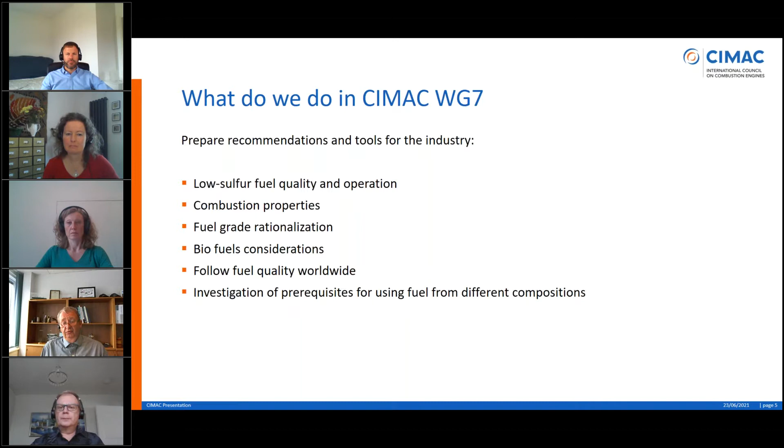Investigation of prerequisites for using fuel from different compositions. We are 36 members. Unfortunately, it's necessary to have a waiting list. We are not able to be as many as we wanted to be. It would not be practical, and it would not be an easy way to have a recommendation made and so on.

We need to be efficient, but we are represented by refiners, suppliers, OEMs like ourselves and MAN, ship operators, fuel testing labs, classification societies, and others. So it's a group of specialists taking care of these recommendations and tools for the industry. We work very closely with ISO 8217, making the standards for fuel oil, and many of us are actually represented there also.

We make a lot of guidelines and publications, and without saying more, I would like to give the word to Charlotte. If you would like to have more information about what we recommend in our tools, please go to the CIMAC website. So I will pass the presentation here and go to you, Charlotte.

Thank you very much, Kjeld. Now let me see if I can show my screen here. Kjeld, can you confirm you can see my screen? I can see your screen, yes. Perfect, thank you very much.

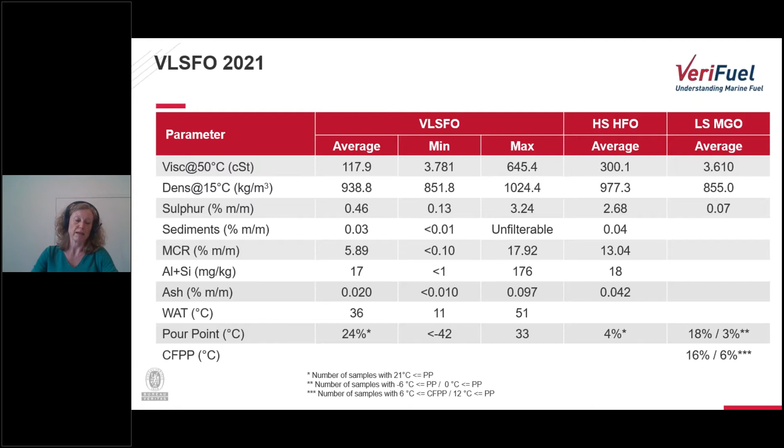What is important to note here is that the separators can easily remove the cat fines from these new fuels compared to the traditional fuels, because the average viscosity and density is lower than what we have been used to in the past. And we can also see that a higher percentage of VLSFOs have a higher pour point compared to the traditional fuels. 24% of the tested VLSFOs have a pour point exceeding 21. They are still within spec up to 30 degrees on the pour point, but we have a higher portion of samples that have higher pour points.

Also, if we look at the operational reports, because one thing is, of course, whether the fuels meet the spec limits, but it's also a matter of how these fuels perform when we start consuming them. For the VLSFOs, on the operational reports that we issue in the Verifuel team, around 50%, half of them, receive some sort of technical advice or recommendation for the crew to take note of in order to ensure safe operation. So if we look at the samples where we issue an amber alert or a caution, it's on pour point, it's on cat fines, and it's on sediment levels.

And then we have those 0.4% of the operation reports that get a real alert, meaning these are fuels that should be used with extreme caution and may cause difficulties to operation. Here we had a few samples with very high cat fines content, as high as 176 ppm. And we have seen some high sediment levels where the samples could not be filtered in the lab because of asphaltenic sludge coming out.

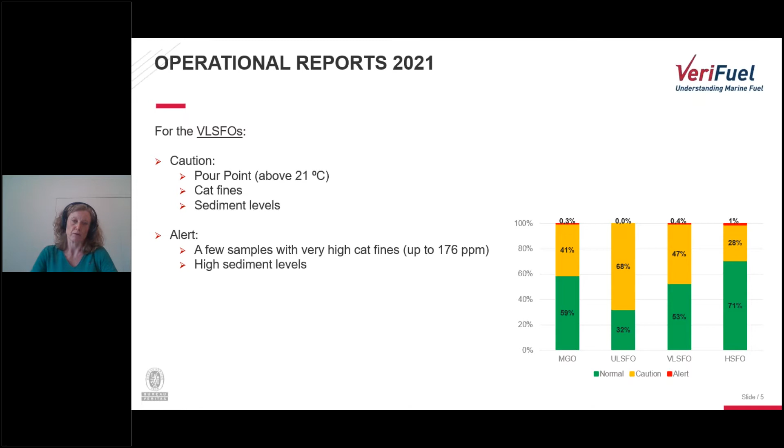So if we just sum up the operational issues that we have seen throughout 2021, as many as 75% of them are related to filter clogging and separator sludging, asphaltenes coming out of solution, either from unstable fuel at delivery or due to an incompatibility because two fuels have been mixed on board. What is a little different now compared to what we have seen in the past before 2020 is that even low mixing ratios may turn a fuel unstable or cause an incompatibility between these two fuels.

The very strong recommendation to avoid experiencing these issues is to keep the fuel segregated, to try to reduce settling and service tank levels as much as possible before changing over to minimize the mixing that may occur on board. And of course, to manage the temperature very carefully to avoid overheating the fuel, because heat may make this process of the asphaltenes coming out even worse or go faster. And especially to be cautious of thermal oil heating, because thermal oil heating may generate some very hot spots around those heating coils. So those are some of the primary recommendations for the industry to be aware of considering the VLSFOs.

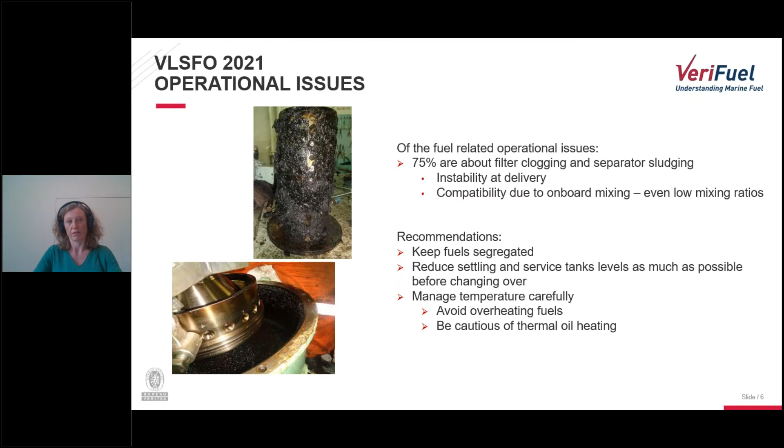Overall, I would say that we do not see more cases of operational issues than we saw before, but of those fuels that do cause issues, it's really related to stability or compatibility of the fuels. That was the very short summary I had prepared related to the VLSFOs and the status.

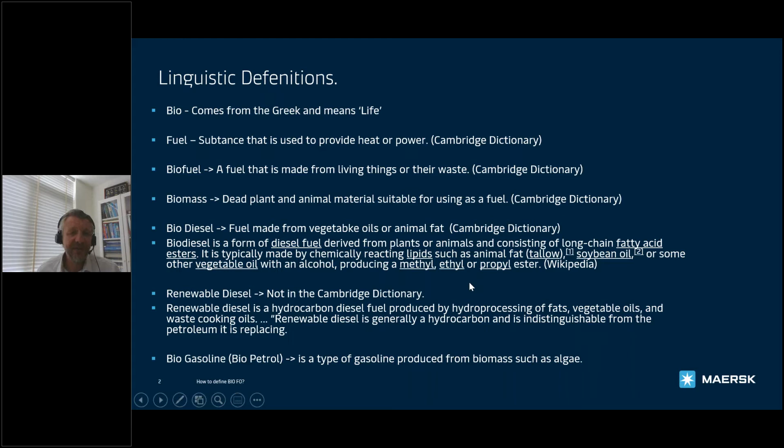Don't forget, there's also other biofuels like biogasoline, which is something we as diesel people do not always have on top of our head, but it's also produced from biomaterial. The reason for this exercise is basically that I wanted to show there's quite some dispute about how you actually use which word for which substance to define a biodiesel, but that's a starting point.

So where are we today? Today we have the ISO 8217, which defines the fuel that we use on board of our vessels, which is predominantly designed around fossil fuels, and that's also how we use it. But it's good to realize that already there's a part which actually contains bio material.

For instance, in the distillate range, we have the max 7% FAME, which is more or less a copy and paste from what's used in the automotive industry. And there's another thing that's not that commonly used, which is the description of the feedstock of the fuel, the material used to produce it, which for this specification is predominantly hydrocarbons from petroleum sources. But there's already also the option to include some hydrotreated vegetable oils, GTL and BTL.

Again, it's not something we currently see much used, but it also emphasizes the fact that we need to work on getting some sort of more guidelines for the industry on how to define a biofuel. So the next slide is a short overview to give you an idea about the diversity of feedstock, but also production processes that are used to create a biofuel.

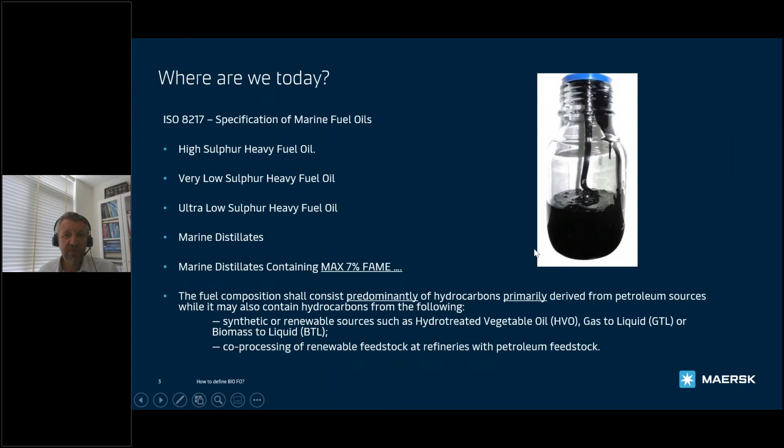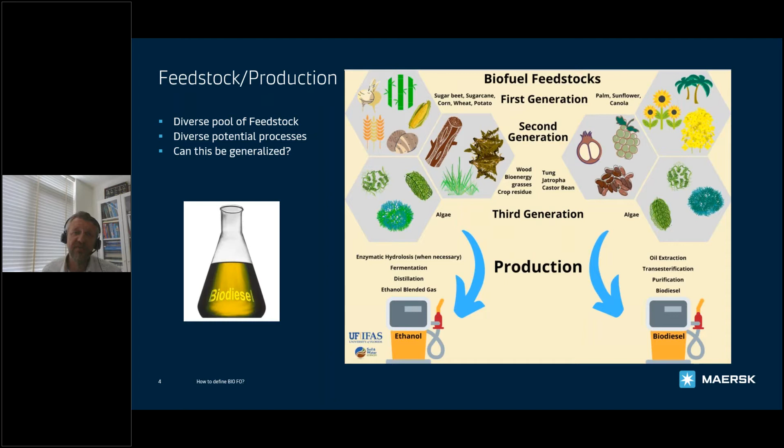I think the main message is that it's going to be hard to generalize everything because there's such a big variety of different components, processes, and streams.

So where does it leave us? It leaves us with overlooking, okay, if we take a biofuel, how are we going to evaluate that? And then we need to take into consideration the operational challenges, and I'm sure my next presenters will give you more insight on that.

A good example is seals. If you take FAME, and you go to 100% FAME, you will see that you need to verify if your seals can actually handle that fuel. You need to look at the effect long-term on the engine. You need to look at storage, long-term storage, but also mixing between products.

And another thing is, what's the true impact on the environment? What's the NOx emissions, for example? There's also another presentation on that, so I will not go into more details.

Another consideration is how do you ensure that the quality of the fuel, or the blend, is actually up to the standard you need to use it safely on board your vessel. That means you need to define what's coming into the marine fuel pool, and the biofeed entering the pool. You need to define how much you'll be blending potentially, and how that end product will look.

Which sounds easy, but if you look at the bunker fuel that we're using, it's going to be more challenging to identify those components.

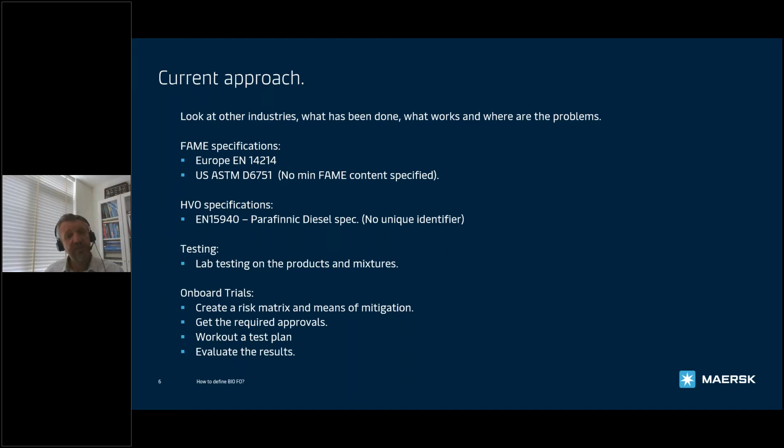You create a risk matrix, look at what the risks are and how you can mitigate them. You need to get the required approvals because you're going outside the specified fuel, so you need to go to your flag state and discuss it with your class, which in turn indicates you need something that sets and standardizes it so others can use it going forward. You work out your test plan, evaluate the results, and then see if it's suitable for use or not.

So how to standardize marine biofuel, how to define it, is basically standardizing it. I think we need to realize there are many unknowns, and that should not be a showstopper. There's a clear need within the industry to continue in that aspect, and that's what we're doing today. Within ISO 8217, there's a focus group on bio currently active.

This group will do a lot of work to actually start including FAME as a blend component into the residual side of marine fuels, adopting the current standard to make that possible and to standardize it so everybody can use it in the future. The second stream is to incorporate different processes that are available, but also side streams from the current FAME process, and see how we can get that certified at some stage into a marine biofuel standard, so those can be used without additional work, in the effort to make biofuel a complementary part of the fuel mix.

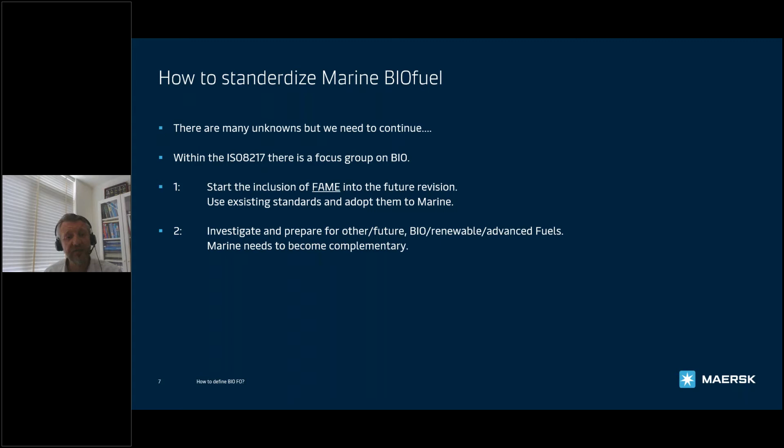That's basically what I had to say about this. I think questions will come later. Yes, thank you very much.

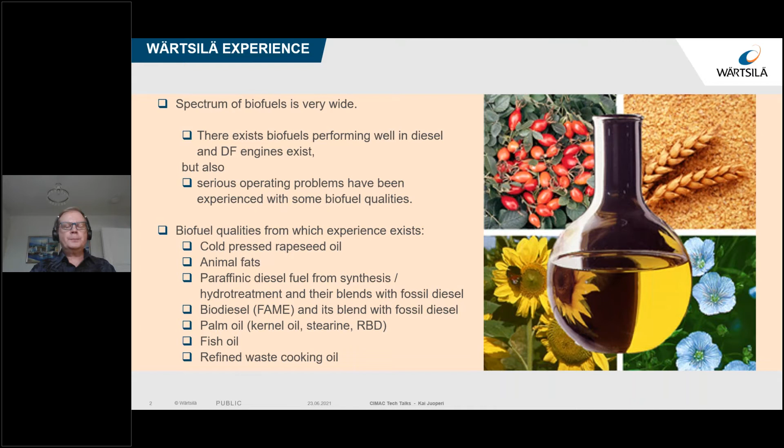So what we have seen in our discussions, both internally and from potential or existing customers, it can be indicated that the interest towards the use of biofuels has clearly increased during the latest years.

On the marine side, I would say that the biggest interest is to use so-called drop-in fuels, so you don't need to do any modifications to the engines, and you can blend those fuels with fossil fuels. So then we are talking about hydrotreated vegetable oils and biodiesel. Some customers are more interested in pure biofuel use, and some are asking or considering that maybe they will use B10, B20, B30. So the percentage of biocomponent has increased, what we have seen lately.

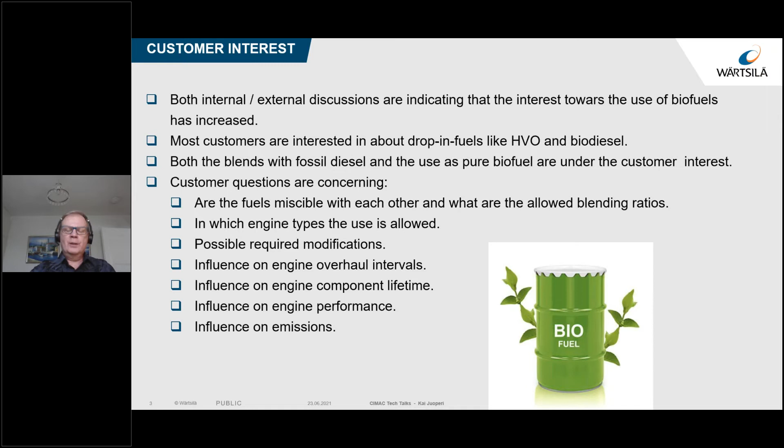I have listed here some typical questions we get from customers. One is, for example, are those fuels miscible with each other, and what are the allowed blending ratios? Then in which engine types is the use allowed? Do we need to do modifications? And what are the influences of using biofuel? Does it influence scheduled engine overhaul intervals? Will engine component lifetime be shorter or longer? And how is it with engine performance? How is it with emissions? Those are very, very common questions.

At the moment, at least what we have seen, biodiesel is the product where the biggest interest exists. So I have listed here pros and cons of biodiesel. Since the fuel is in practice close to sulfur-free, sulfur oxide emissions are also at very low level. The same is valid for particulate emissions. Sulfur and ash are the main contributors to particulate emissions, and those are at low level. And then what is the whole meaning of using biofuels is to reduce CO2 emissions.

Biodiesel mixes well with petroleum diesel. It has good lubrication properties, and it can be used in existing engines without modifications. And like we already heard from the previous presentation, there are also international standards available, which are good since the quality is then specified.

Then going to the negative things. I think the first one is creating nowadays a lot of discussions, and I think we will hear more in the later presentations. Also various experience exists. Our estimation, based on some measurements we have done in the laboratory engines, is that the NOx emissions are increased by 10 to 20% when using pure B100, so 100% biodiesel. And then various factors play a role, of course, like engine design and the combustion process. Also the raw material used in biodiesel results in different NOx emissions.

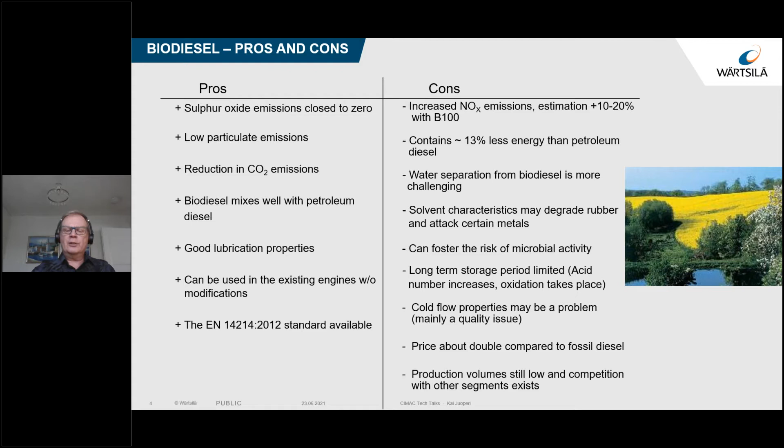Then price, that is of course something which is influencing customer decisions, whether they are interested in using it. And today the price is about double compared to fossil diesel. And if we think of the whole need of the marine industry, how much fuel is needed, production volumes are still low, and then there is also competition with other segments like automotive, for example.

Here I have one customer case from the field, a Norwegian customer, United European Car Carriers. They have quite many vessels with Wärtsilä engines. This is a vessel called Autosky, and it has two Wärtsilä 8L46 main engines. The customer has used a GoodFuels product, MR100, and at the time of investigation they had used it in both engines for more than 3,000 service hours.

Lube oil in the engine is a standard commercial, let's say, 40 BN, 30 oil. I would say they could manage even with lower BN oil, but since this has not created any issues, they have continued the use. The vessel engines are going through scheduled maintenance regularly.

When the biofuel use was investigated in more detail, fuel injection equipment is obviously where we first see issues if something is seen, and the injectors were inspected in more detail after the biofuel trial, but nothing abnormal was observed. The only negative thing the customer indicated was that there has been some wax formation in the fuel leak pipes, and now they are planning to install trace heating on all leak pipes so that possible clogging and wax formation can be avoided. And the customer message was that they are happy with the gathered experience and are planning to continue biofuel operation on these engines.

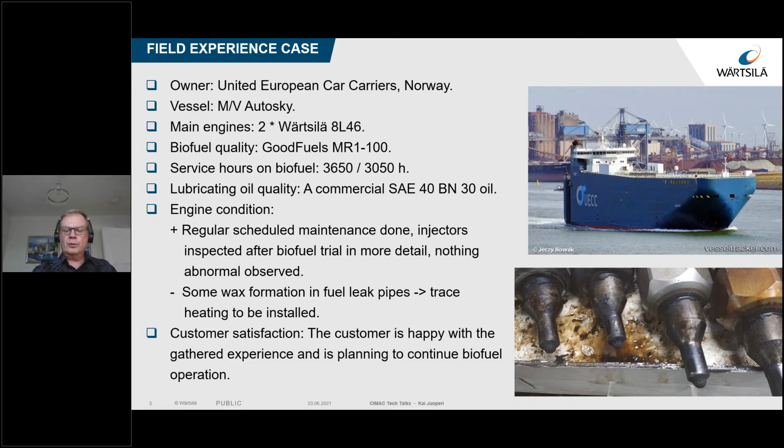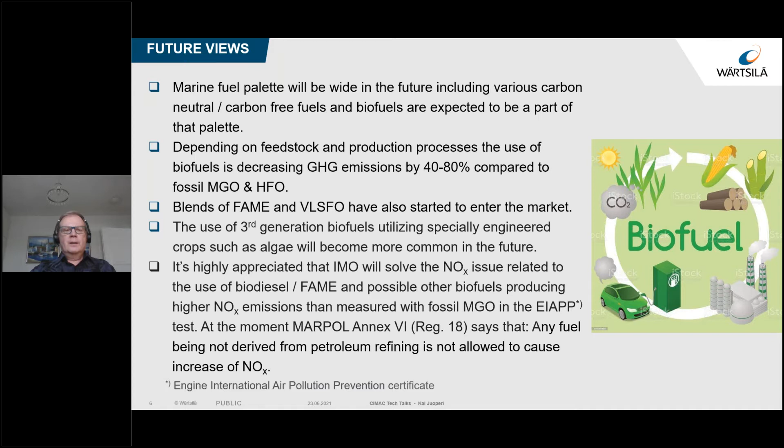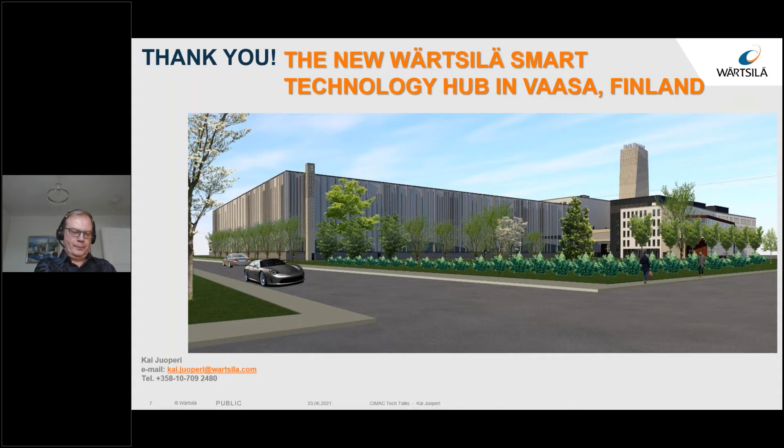So that was what I prepared for this event. Thank you. Thank you very much, Kai. Remco, are you ready? Yes, I am. Thank you very much. Let's see if this works. Yes, we can see it. Oh, that went a little bit too fast. Let me see if I can close it.

So thank you, Kjeld, and I would like to thank you all for the opportunity to speak today. I'll be discussing the handling of biofuels on board, focusing on fuel treatment systems such as the separator and the fuel conditioning systems, as well as the storage and further handling of biofuels in the tank.

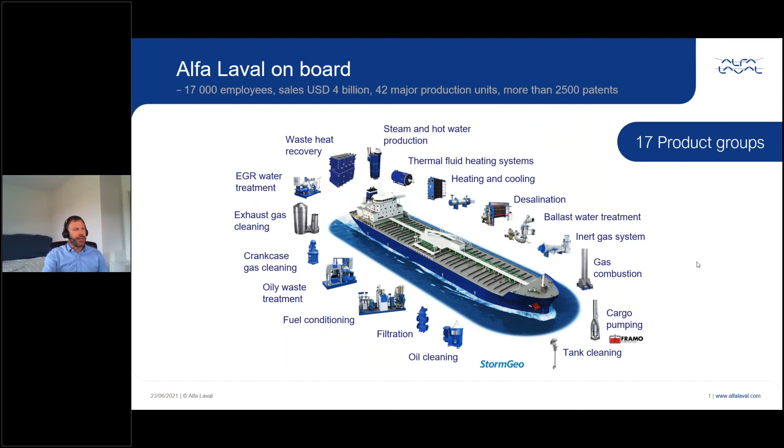So let's start with the treatment on board. Now, the good news is biofuel is fuel. It needs to be conditioned by heating and pressurizing. It needs to be cleaned using separators and filters, and it should not be mixed with other fuels due to potential incompatibility.

But since the introduction of the VLSFO fuels, ships have already been forced to pay much closer attention to fuel properties, and the fuel management plan does not need to be altered much to incorporate biofuels. Everything that Charlotte said was actually applicable.

Temperature is the critical factor here. Treat the fuel too cold and you have to deal with cold flow problems. Too warm and the biofuel will degrade faster. And these points can lie quite close to one another.

One other factor that directly affects biofuel properties in a negative way is the presence of water, as mentioned before. FAME is prone to bacterial contaminations that require water to reproduce. Thus, removing water at all times reduces the amount of contamination over time. So to be clear, this needs to be done in all tanks, including bunker tanks. Actively check for the presence of water at all times.

Water contamination leads in time to acidic products and sludge buildup with associated operational problems, such as filter and separator clogging or blockage of the fuel injector nozzles. Good housekeeping of biofuels is key. Dewater and use the fuel as soon as possible.

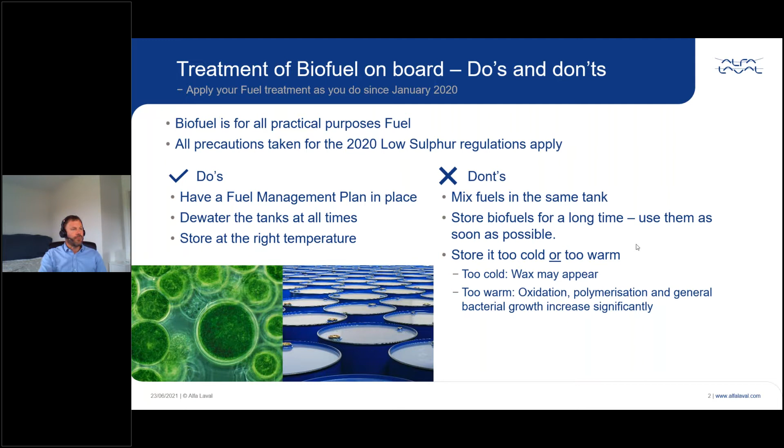Now, as Dax and Kai mentioned, apart from storage and handling, since FAME is more corrosive than fuel oil, it is important that the equipment in the fuel line can handle it. Therefore, I recommend verifying with your suppliers that their equipment can handle FAME. For example, the internal coating of a viscosity meter, O-rings in the separator, a mechanical seal in the transfer pump can all potentially suffer from FAME and lead to equipment malfunction.

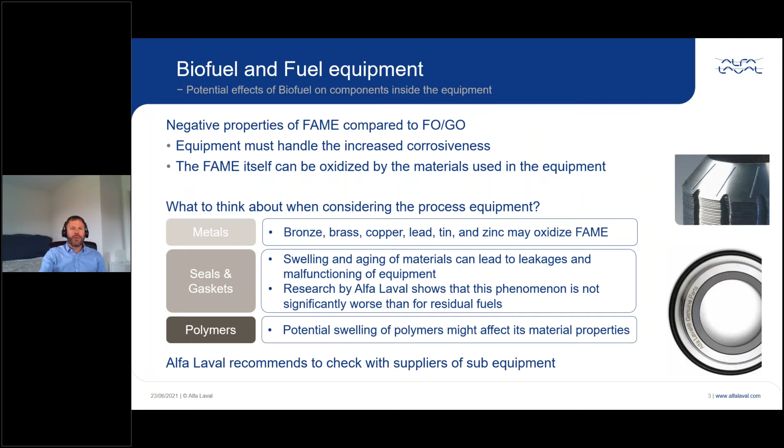So far, research and field tests have shown that for seals, gaskets, and O-rings, that phenomenon is not worse than for heavy fuel oil, but older equipment may not meet the expectations when using FAME. Also, consider the metals inside your equipment. FAME has oxidization properties that affect metals to one degree or another. A couple of examples are shown here on the screen. But in general, using a fluid like FAME for which the equipment is not specifically designed means verifying that the equipment will not suffer from its usage.

The cold flow temperatures of FAME are dependent on the feedstock, and relatively high. A short recap. Cold flow properties are noted from the lowest temperature up. So pour point is always the lowest cold flow property of a fuel, followed by the CFPP, and finally the cloud point, whereby pour point is the lowest temperature a liquid is pumpable, CFPP is a quantitative measure for the amount of wax, and cloud point the highest temperature wax crystals will appear. Now, problems with waxing won't appear above the cloud point, so once this is known, I recommend to keep the fuel above this temperature.

Trials are now carried out with mixtures of FAME and mineral oils with high blend ratios. And these are not only blends of FAME and distillates, but also of FAME and residual fuels. Cloud point and the CFPP are reliable minimum temperatures for distillate blends, but these temperatures cannot be determined with residual blends. So when encountering mixtures with heavy fuel oil, the WAT, the wax appearance temperature, is used instead.

And I recommend to specify this test to be performed in the bunker analysis. However, the wax appearance temperature does not give an indication of the amount of wax produced, only the temperature at which it will occur. So for safety reasons, it is better to keep the temperature above the WAT.

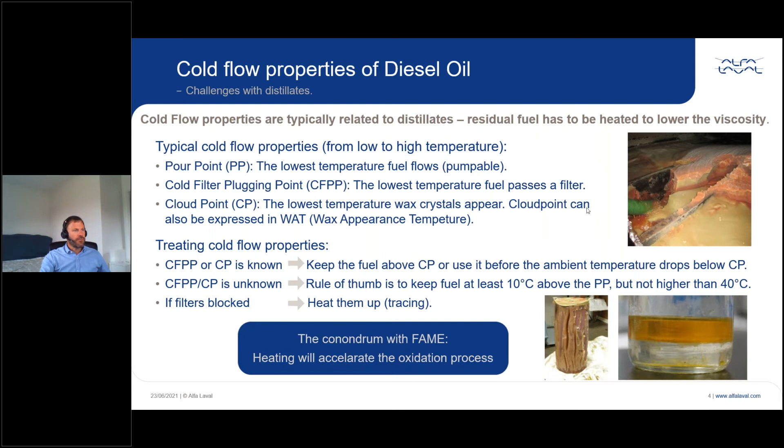A special on hydrotreated vegetable oil treatment in the separators. Fossil fuels, whether they are heavy fuel oil or diesel oil, typically do not have densities below 800 kilogram per cube. Separators are therefore typically not designed for the densities of HVO, which are specified as being between 770 and 790 kilogram per cube. This in turn creates some interesting problems that you need to be aware of.

Purifiers running with a gravity disk typically do not have a gravity disk for these low densities. Running the separator will cause very bad separation efficiency. So if you start using HVO, I recommend to run the purifier as a clarifier, so without a water seal, or to request an HVO gravity disk if available.

Automatic separators, such as the ALCAP separators from Alfa Laval, can handle HVO in a proper way, but I recommend to contact your separator supplier for potential problems or for modified settings to optimize the running of the separator. All of these solutions are maker and model specific, so there is no uniform solution.

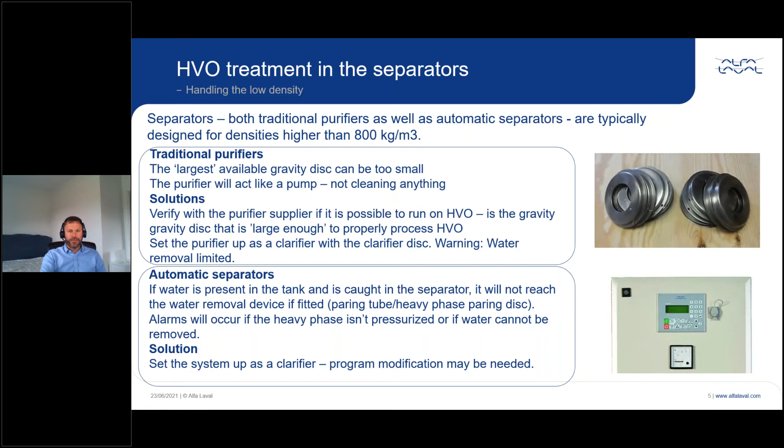Biofuel producers are actively testing their fuels in field tests and in laboratory tests. A test with BTL, biomass to liquid, will soon start in the Alfa Laval test center in Aalborg. Producers offer a large variety of their blends for testing, and it is relatively easy to test the fuels and reject those that, for example, produce a lot of sludge.

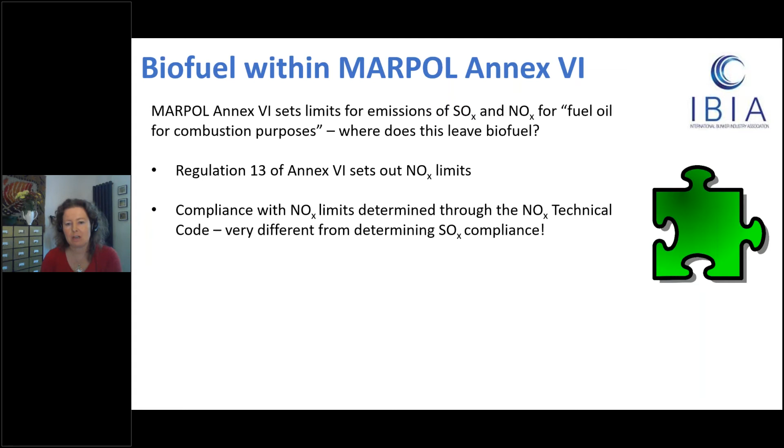Regulation 13 of Annex 6 sets out the limits for NOx, but compliance with the NOx limits is determined through the NOx Technical Code. And this is where it becomes very different from determining compliance with the sulfur limits. Because as you know, we have the 0.1% sulfur limit in the emission control areas, and outside of emission control areas the limit is 0.5% sulfur, and it's related to the sulfur in the fuel. If you're going to use exhaust gas cleaning systems, you need to prove equivalence with that sulfur limit. NOx is a little bit different.

And as Kai alluded to in his presentation earlier, there's an issue here with Regulation 18.3 of MARPOL Annex 6, which talks about fuel oil quality, because it differentiates between, in 18.3.1, blends of hydrocarbons derived from petroleum refining, i.e. your traditional bunkers, and, in 18.3.2, fuel oil for combustion purposes derived by methods other than petroleum refining. And of course, this is where you get your biofuels and your biofuel blends, which don't come from just refining crude oil in a refinery.

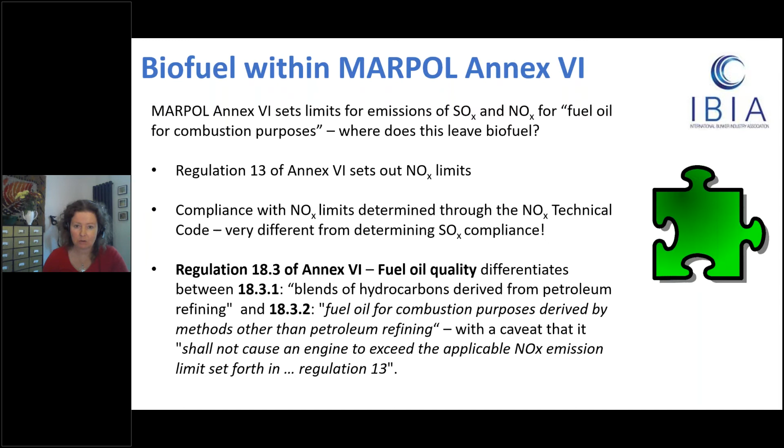And there's a caveat there that it shall not cause an engine to exceed the applicable NOx emission limits set forth in Regulation 13, which is where the limits are. So let's have a look at Regulation 13, NOx emission limits. There are different tiers for different ships. If your ship was constructed before 2000, there is no specified NOx limit because it wasn't developed yet.

Then you have Tier 2 for ships constructed on or after the 1st of January 2011. And you have a final Tier 3 for ships constructed from the 1st of January 2016 onwards, when they are operating within a NOx emission control area. Because emission control areas can set limits for sulfur, which we know is 0.1, they can also set specific limits for ships' NOx emissions. And those limits are significantly tighter in Tier 3 than in Tier 2, which is applicable when ships are sailing globally outside of NOx ECAs. And it only applies to ships constructed from 2016 onwards.

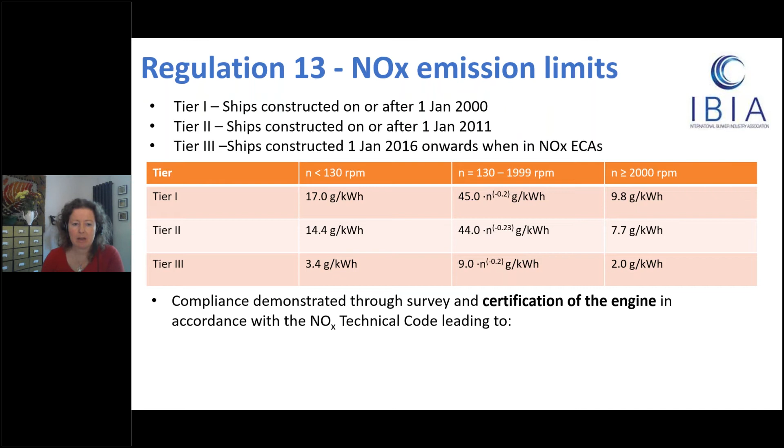So how do you demonstrate compliance with these emission limits, which are defined in grams per kilowatt hour? It's through survey and certification of the engine in accordance with the NOx Technical Code. And as Kai mentioned earlier, this leads you to obtain an Engine International Air Pollution Prevention certificate. And when you get that certificate for your engine, it's based on a specific test fuel oil, which is specified in the NOx code. The test fuel oil has been defined as ISO 8217:2005 distillate marine grade. So typically, the engine test will be performed on a marine gas oil, for example.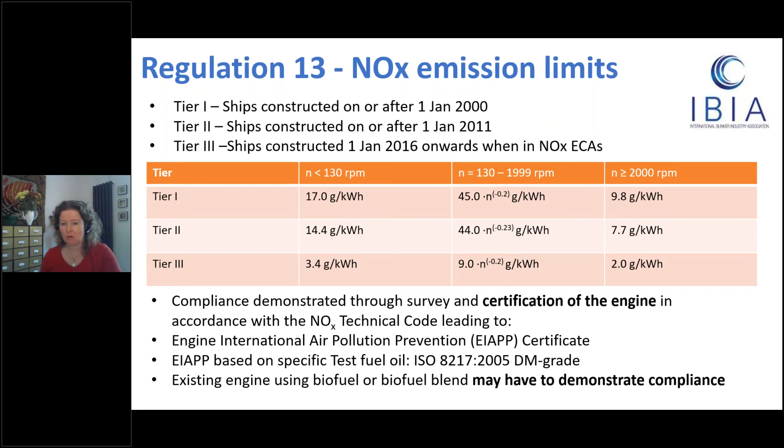So the existing engine using a biofuel or a biofuel blend may then have to demonstrate compliance with that, because it's no longer just a fuel according to Regulation 18.3.1. So the problem we have here is, how do you prove that the engine does not exceed the applicable NOx emission limit when the certificate is based on a test running on DM grade oil-based fuel oil?

It may, in fact, require onboard emission testing for fuel from non-petroleum sources, where the results could be presented in grams per kilowatt hour. Unfortunately, that's shown to be not particularly practical or reliable. You know, for ships that are using scrubbers or exhaust gas cleaning systems for sulfur, they can have a continuous emission monitoring system. Would you require something similar for NOx? To my knowledge, that isn't particularly well developed right now, so there is an issue here with that.

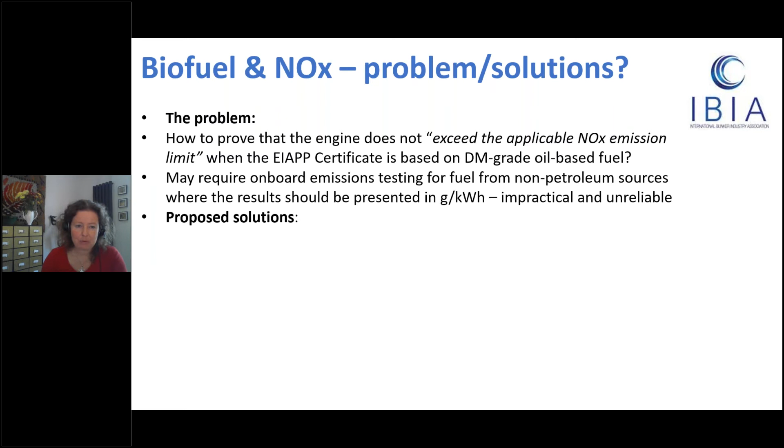Is there a way forward? There have been some proposed solutions going all the way back to 2016, actually. One is to allow Regulation 18.3.1 to cover all fuel oils and delete Regulation 18.3.2, which sets a specific mention of oils that are not from petroleum refining. And the reason IMarEST came up with that was that they recognized that there was a problem with the language in the NOx code for introducing biofuel and biofuel blends.

Then much more recently, there have been 2 papers actually put into MEPC 76. Now, because MEPC 76 was rather busy with other things, they didn't come up for discussion at the meeting that was happening very recently. But they are due to be considered at MEPC 77, which is due to take place in November this year. And one of these papers came from a group of countries: Germany, France, Greece, Japan, Singapore, and ICS. And the crux of it is that they invite administrations of parties to MARPOL Annex VI to issue temporary exemptions for ships conducting biofuel trials for greenhouse gas reduction purposes. And there are already exemptions within MARPOL, for example, for running emission control systems, such as exhaust gas cleaning systems. So their approach is to encourage administrations to provide these kinds of exemptions.

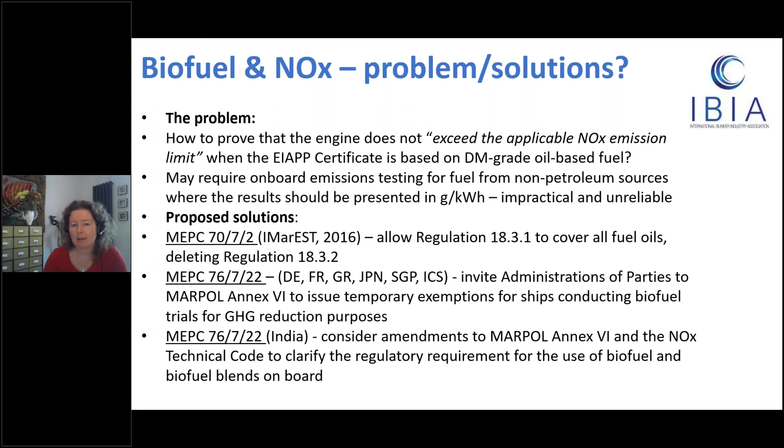Then there's an interesting paper also from India, which says consider amendments to MARPOL Annex VI and the NOx Technical Code to clarify the regulatory requirement for use of biofuel and biofuel blends on board. And to me, the proposals within that paper are a little bit more similar to what IMarEST proposed back in 2016. So there could be a way forward here.

Now, biofuel, of course, why are we interested in it? At the moment, it's not because it's cheaper, it's because of the emission reduction potential. So how does it compare to, for example, a distillate marine grade marine gas oil? We know that there's less sulfur emissions, but in fact, when you are burning it, it's quite similar in terms of the CO2 produced during combustion. And for NOx, as you heard from Kai earlier, there's some evidence that the NOx emissions might be higher, 10 to 20% for 100% biofuel, he mentioned, which is interesting.

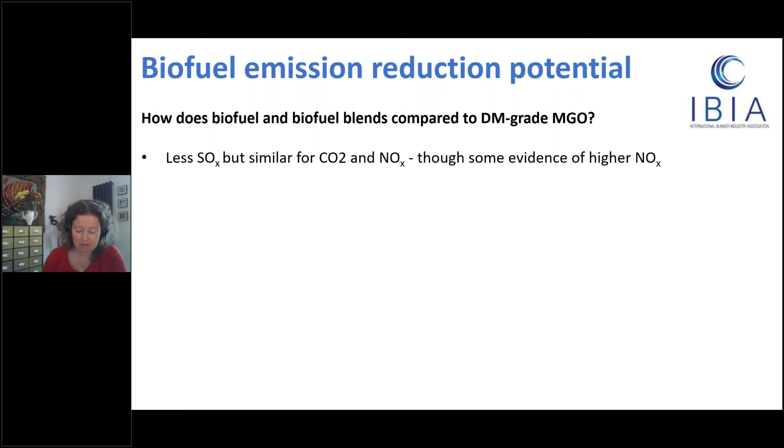But of course, we're interested in it because of the significant potential for reducing carbon intensity if we are talking about fuel from a well-to-wake life cycle emission perspective. You're not talking tank to wake, you're not talking just about putting it in the engine and what comes out of the stack. You're looking at the way that it could reduce overall well-to-wake emissions because of life cycle emission assessments. And this is where the IMO's initial greenhouse gas strategy comes in with an interesting point.

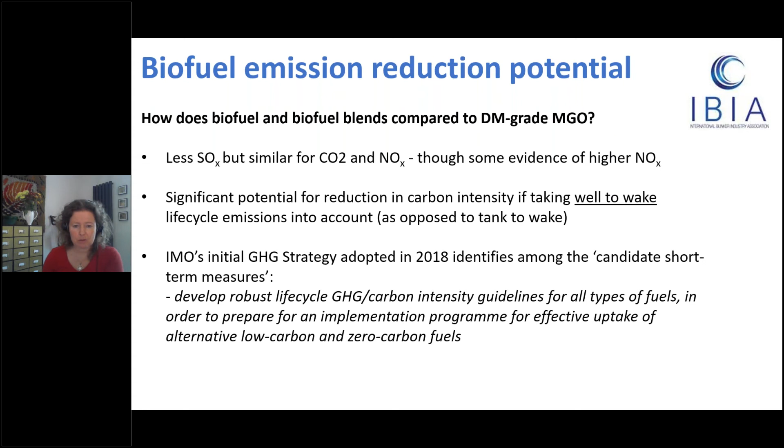It identifies among the candidate short-term measures, which are the ones being looked at first, to develop robust life cycle greenhouse gas / carbon intensity guidelines for all types of fuels in order to prepare for an implementation program for effective uptake of alternative low carbon and zero carbon fuels. So of course, it is there within the IMO's greenhouse gas strategy, and that might be helpful.

Now, within that paper from India I told you about, it's quite interesting. It talks about an experiment with sea trials conducted on 2 ships. It went on for 3 months under all sea conditions in both loaded and ballast passages, so that all sorts of conditions could be covered. In order to run this analysis, they measured emissions at different engine loads with a certified flue gas analyzer and NOx analyzer in line with what's described in the NOx Technical Code. Now, they used 2 ships. One of them is certified for NOx Tier 1. The other one predates the NOx tier requirements. So they were clearly quite different ships.

And so what they tested was a B20 biodiesel blend compared to a low sulfur high-speed diesel, which was less than 1% sulfur. And for the first ship, the NOx Tier 1 ship, they saw approximately 2% reduction in NOx emissions. And for the older ship, it ranged from as little as 6 to as much as 28% reduction with this B20 blend compared to using oil fuel, high-speed diesel.

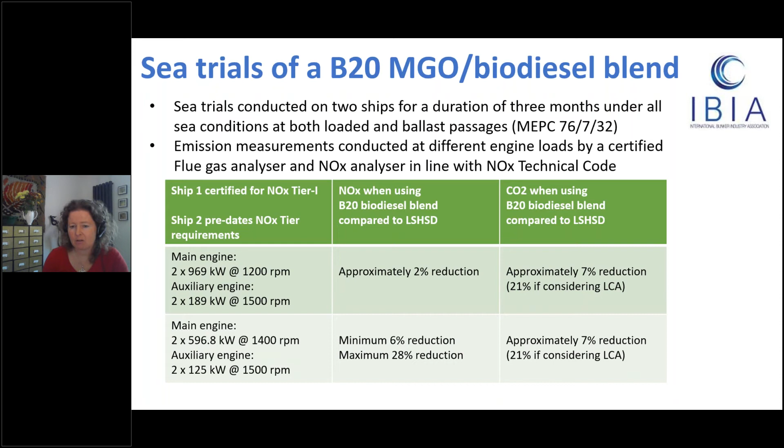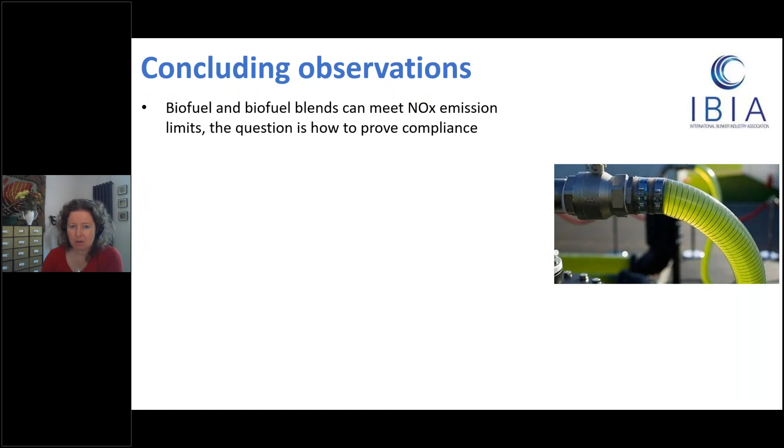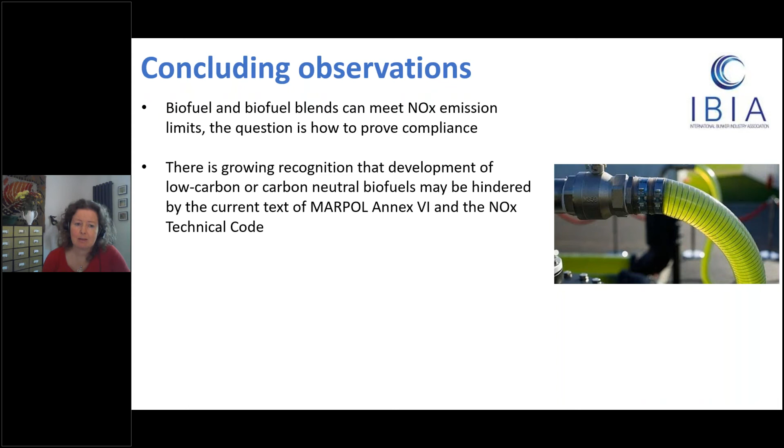So to conclude this little look at this, it's for sure that biofuel and biofuel blends can meet NOx emission limits. The same technologies that are used to reduce NOx emissions from existing engines can be used with biofuels as well. The question, it would appear, is how do you prove that compliance on an ongoing basis if you're not looking at changing MARPOL Annex 6. And there is growing recognition that the developments of low carbon and carbon neutral biofuels could be hindered by that current text of MARPOL Annex 6 and the NOx technical code.

So is there a way around that? Well, MARPOL Annex 6 amendments, they take time. First of all, they require broad support at IMO, and they need to be taken forward under a new output under IMO procedures, and that's IMO speak for accepting a new item to be put on the agenda and added to the existing work programs. And that isn't taken lightly, since the IMO has a lot to do.

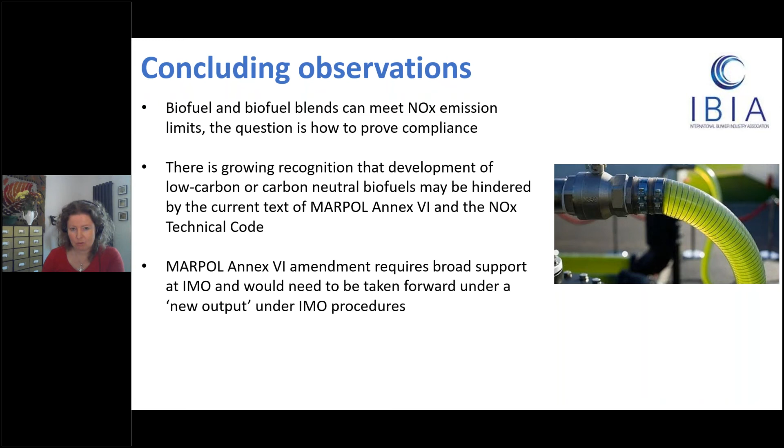However, considering that member states are now looking at this, and you have member states talking about putting forward a new output proposal, certainly that's in the paper from India, or indeed they might try to cover it in the IMO's initial greenhouse gas strategy, I think the appetite is there to actually do something about this. So that's what I had prepared in terms of looking at this.

So now I guess we can go to the panel discussion. Thank you very much. Thank you very much, Unni. Yes, we are going to the panel discussion. Yeah, everybody.

Yeah, I think actually that we would start where you left, Unni, because your presentation sparked some interesting questions here. And there is one here regarding the reduction shown on the sea trial of B20. The question is, I guess they also made some changes on the engine, like the timing. Isn't it possible that the engine setting is the reason for the NOx reduction and not the fuel itself? Well, I would have to read the paper in more detail. From what I understand, they ran the ships in similar conditions with both the biofuel blend and with the low sulfur diesel. So I'm not quite sure how they achieved those reductions. They seem to indicate that it's due to the fuel, and that otherwise conditions were identical.

Now, one thing that I didn't mention during my presentation is that when it comes to the development of NOx as an emission, it seems to have less to do with the nitrogen in the fuel that you use and more to do with the combustion temperature being a determining factor in how much NOx is produced, which is one of the reasons why LNG, for example, is producing so little NOx.